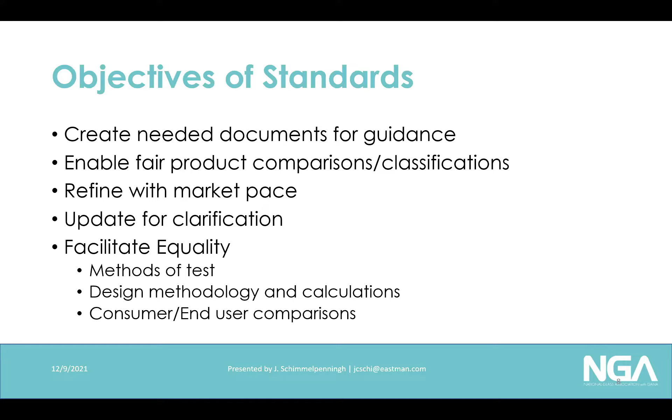That means that we have methods of tests, design methodologies and calculations so that everyone is looking at things the same way. We're also trying to provide information so consumers and end users can make fair and level comparisons. With those objectives in mind, we are going to dive into what we have for new standards for laminated glass.

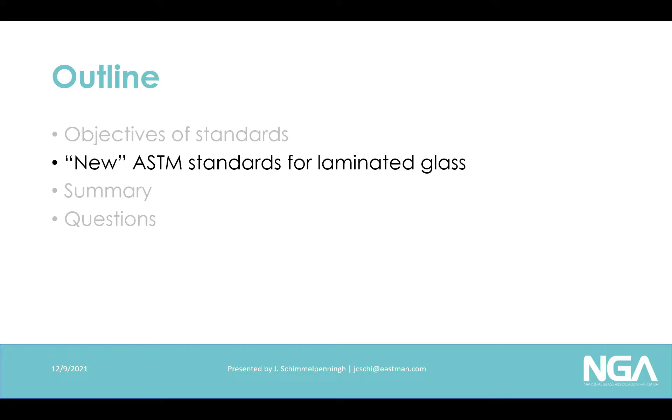As you all know, there are several standards for glass and glazing and laminated glass in general that have been published and serving the industry very well for many years. So one of the things we want to look at is why were these new standards needed? It's always a question. Some say, don't add the complexity, we're okay where we are. Others say the industry is evolving, we need some guidance and field posts as to how to talk about these products and compare performances.

So we will look at why these particular standards were needed, where did they come from? Obviously they don't grow out of the ground, it comes from some type of documentation at some point. And then we'll also look at how will they be used, which we'll get into at each stage. But where did they come from is one of the things I do want to answer.

The ones we'll be talking about, at least the first two, have come out of a need for harmonization that occurred with ANSI Z97.1, the safety glazing standard for tempered glass, laminated glass, chemically strengthened glass, etc., used and referenced in the US by itself or through the CPSC, the Consumer Product Safety Commission. There is a big section within that standard that covers a lot of documentation, and the committee did think it would be best if those items were pushed to a larger forum and approved by the industry as a whole versus the smaller committee, ANSI Z97.

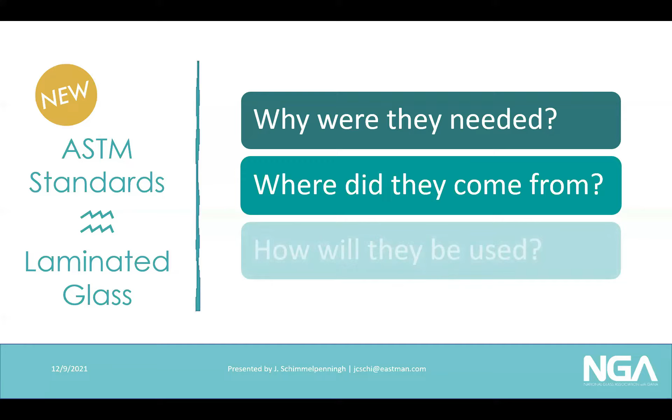The third one, which is more of a quality and specification standard that we'll get to, is needed because of all the new applications or extended applications that laminated glass is seeing, and it has to do with adhesion. So we will address these three questions throughout the remainder as we look through these standards.

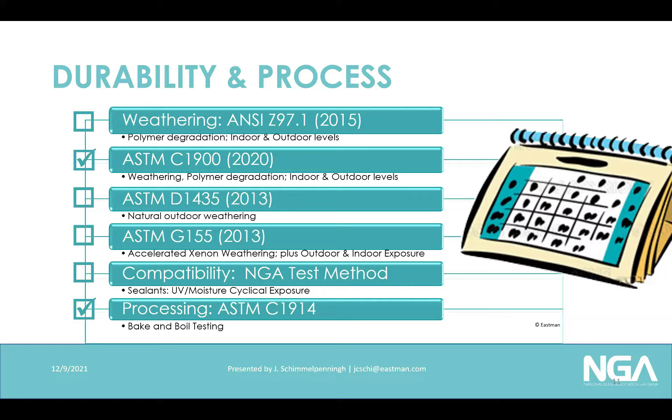So with that, the C1900, which is the weathering standard, is intended to cover the procedures for exposure of laminated glass, to look at the durability of the product and any polymer degradation. The standard itself gives you two main options to test in: an accelerated mode, which is a 3,000 hour mode, or a natural exposure mode, which is done outside in the sun.

We'll talk about all of those different modes. The time duration is specified by the authority having jurisdiction, so this standard does not specify a time or duration of exposure. However, a document like ANSI Z97 will give you the required exposure duration to meet its standard requirements, and in this instance, ANSI Z97 says it's 3,000 hours of exposure.

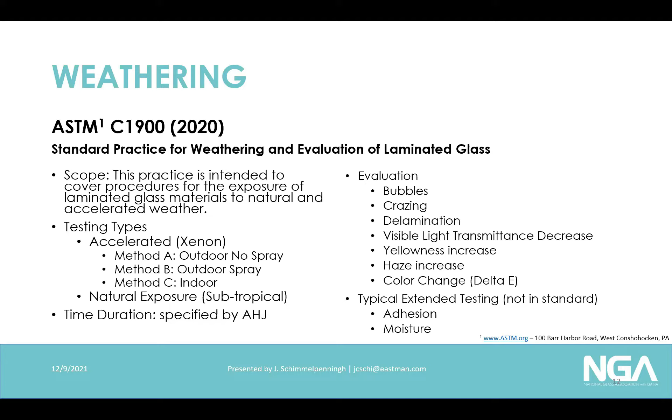Typically, the external use products here are things like facades, storefronts, windows, doors, and that type of stuff. You can use external exposure to clarify or qualify things for indoor use as well. Typically it's the same exact exposure, however done under a 3mm piece of clear glass. A little tougher—I think in the industry many people revert to the accelerated method for indoor exposure because of the complexity of mounting all of that on these frames. But products that would typically need indoor exposure only are things like partitions, shower doors, fins, balustrades, furniture, anything that might be located on the inside of the building.

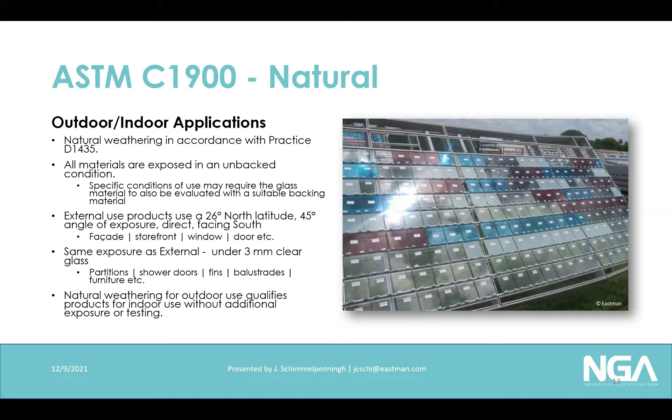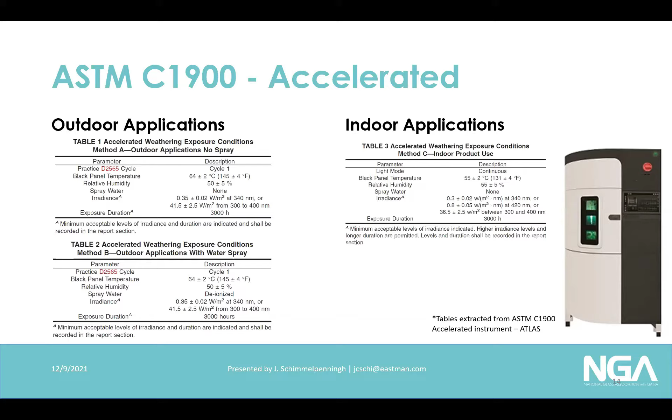When choosing a dry method over a spray method, I think the reason both are included is that currently ANSI Z97 requires the water spray. However, because of etching of the glass and the inability to get very accurate measurements, the dry method was put into ASTM as an alternative. We can talk about how you do that as well.

So what's the industry impact of C1900 coming onto the scene? The good part is there's no change in the irradiation for accelerated weathering for ANSI Z97, and no change for natural exposure either. The only difference is C1900 gives you a very concise dry method, whereas ANSI Z97 currently only requisitions the spray method, requiring you to weather another piece of glass as a control. So that's one change. The good news for the industry is you don't have to redo a whole bunch of accelerated weathering to comply with C1900. It standardizes weathering and reporting for materials, allowing comparison under the same conditions.

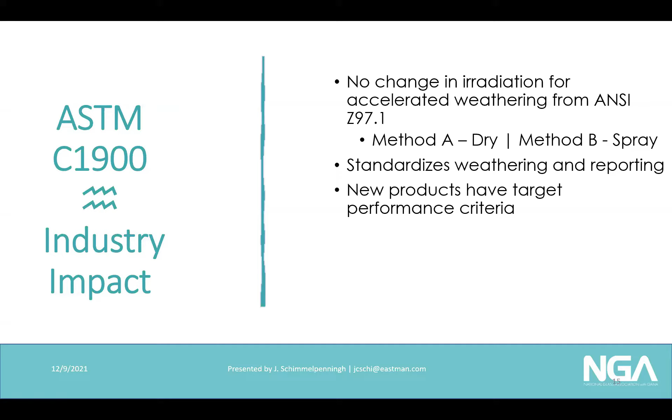New products have target performance criteria to meet, so it's good for the people creating new products, as well as good for the industry, to see how they compare with a very well-known set of criteria.

It's compliant with SGCC requirements, meaning we did not change the weathering portion of it. So as long as you follow the ANSI B method, everything will still meet SGCC. Again, you do not have to go and requalify anything.

There may be a renewal period and some other things like that from SGCC, but the method itself is compliant. What we may see is increased requests for exposure data and compliance from downstream. With these standards becoming international standards, people become aware and may start asking additional questions and for additional backup data.

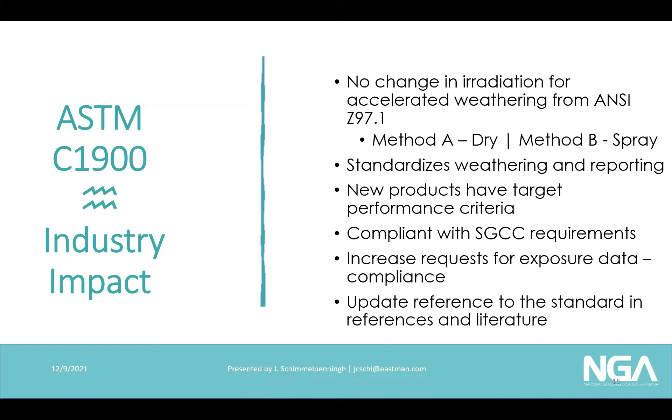The other part of having an international standard through ASTM is the update of references in our standards and literature, our laminating reference guide, and all those things. That will need to take place, and will be something we'll be talking about and working through in further NGA conferences.

The next standard is ASTM C1914, just published this year. It is the standard method for bake and boil testing of laminated glass. The great news is it is not a change from anything we are used to—it's just put into a consensus standard and gives us a little more detail on how to run it and how to rate it.

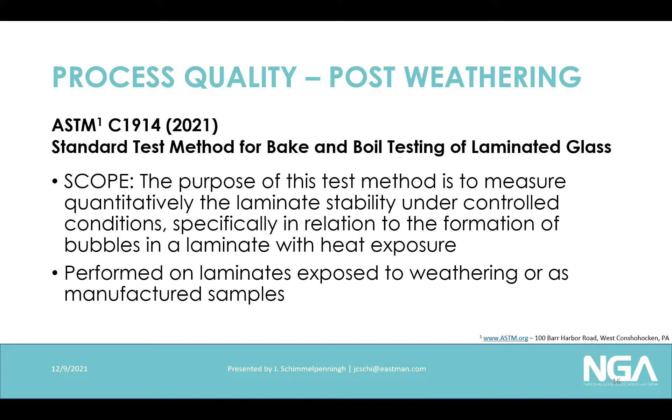The purpose of this test is to measure laminate stability under heat exposure, and give us an assessment that can be used for quality control. You can perform this test on laminates exposed to weathering—if you put something in an accelerated chamber or products come back from natural exposure, you can run these tests to see how they do. So it can be run on weathered samples as well as samples coming off the manufacturing line.

It is a visual rating after you subject the samples to heat. The heat can come in two ways: at 100 degrees C, 212 F. The boil is for 2 hours—you literally submerge the laminated glass into boiling water for a 2-hour time frame, then take it out and rate it. Or you can put it in a 212 degree oven for 16 hours, then take it out and rate it. What it does is determine the stability of laminated glass in these high heat environments.

It has always been referenced as the standard temperature and time in ANSI, and also for both the automotive industry and the architectural industry. A couple things it does: it determines if there's a large amount of excess air or moisture trapped in the interlayer that can cause issues.

It's a good indicator of high moisture content, and it can also indicate if volatiles are formed with exposure—say there may be some polymer degradation. You may see boil or bake failures when samples come back after exposure.

One thing the boil and bake test doesn't do is provide an indication of laminated glass being capable of impact resistance, glass shard retention, or anything on breakage or edge stability. It truly is a durability test.

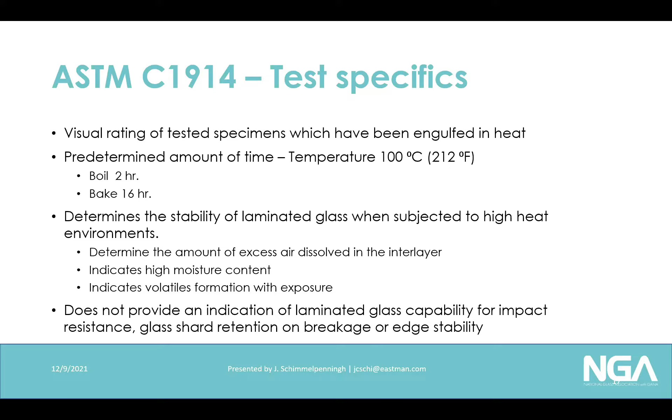What it looks like: it's typically run on either a 12x12 or a minimum size of 6x6. You do 3 specimens per test—meaning you put 3 specimens from the same run or same laminate into the boiling water, take it out 2 hours later, or put it in the oven and take it out 16 hours later.

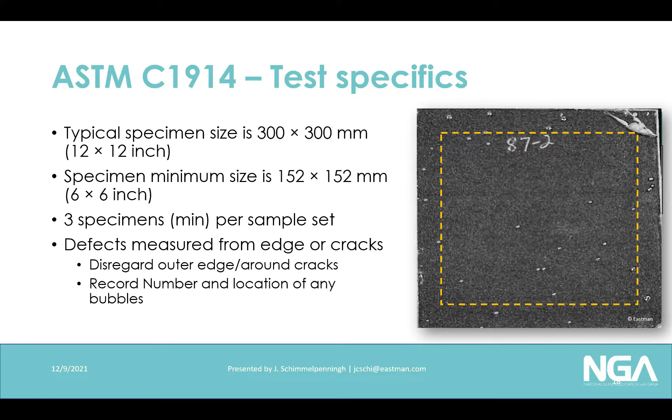One thing the test does allow is that you don't rate from the edge and you don't rate from cracks. Part of that reason is as you section or cut apart to do the testing, you can falsely destroy the edge. So it gives you a leniency of about 13 millimeters to look at that.

What's the impact of this standard on the industry? Again, no change to the requirements. The standard can act as a processing check for quality control and also for weathering. Same thing—new products have a criteria.

A watch out is that the newly approved ISO standard for laminated glass in Part 4 is not the same as this. It allows the user to decide whether they want to boil for 2 hours or bake for 16 hours, or vice versa.

So it does have the boil for 2, the bake for 16, but the user can choose whichever combination of those methods they want. So a caution to any of you that are specifying or looking at that is to make sure if it says it's compliant that you get what you're asking for.

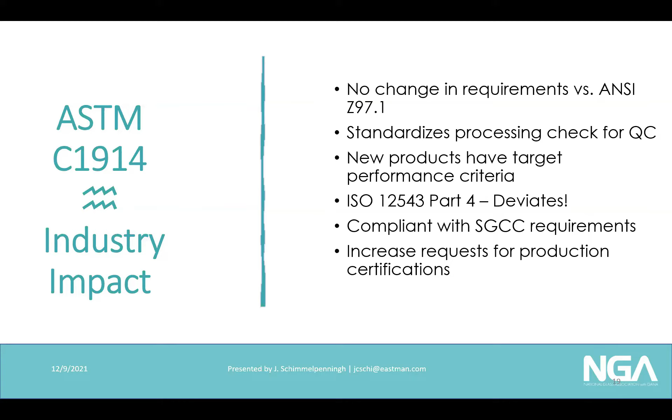This also is compliant with the test method for the SGCC requirements because it follows ANSI. And we may again see increased requests for production and certifications on this.

Okay, so the big change in the last few minutes is the adhesion test. This is the Pummel adhesion test. Now the Pummel test has been around in the industry for decades. And this is a method to look at the relative strength of the adhesive bond between the interlayer and the glass, or inks in the glass or whatever.

It is a method that is destructive. It can't be run in place. It has to be done in a laboratory. And again, it is a destructive method. So don't think you're going to do this and then go forward. So you have to have specific samples for it.

You can use it to look at all different types of laminated glass. Typically 2 layers of glass is where you want to stop because then it gets a little erroneous. One of the surfaces can have anything on it, inks, coatings, frits, patterns, whatever. You will note that because there can be some differences based on those materials and the level of adhesion.

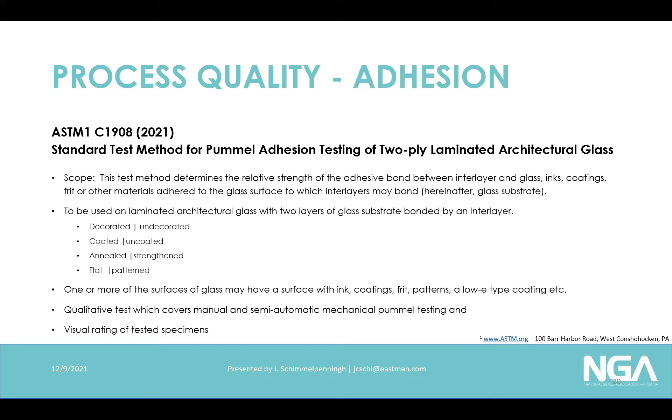It's a qualitative test and it covers both manual and semi-automatic pummeling, and we'll show you that, but it is a visual rating. The test method is a visual rating right now. So how do you do this test?

It's very rapid, and I can go through all the words of it, but we do have a video that will show it to you. So I think that will be a little bit more illustrative, but it's a rapid, systematic, really hammering of the glass. It's progressive striking. And what you're trying to do is expose the interlayer. You're trying to get the glass that easily comes off of these products to come off so you can understand the level of adhesion you have.

There's a certain amount of energy necessary to pound this glass off of it and separate the 2 surfaces, the glass and the interlayer. And the strike face of the hammer needs to be as flat as possible. Otherwise, you can skew the results.

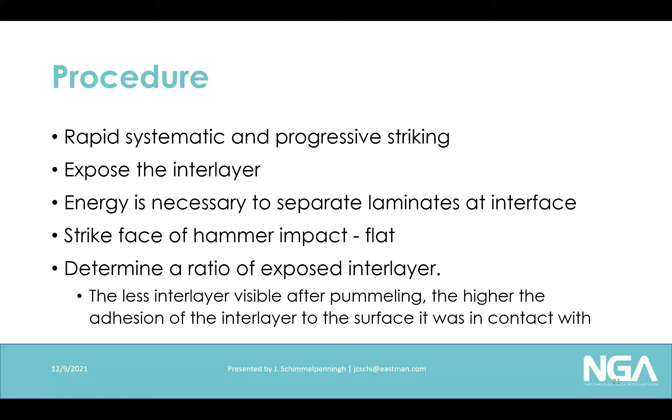And so what it's doing is determining the ratio of exposed interlayer. The higher the amount of exposed interlayer, the lower the adhesion. So what you're really trying to look for, depending on your application, is that balance of exposed interlayer and glass to give you the performance attributes you're looking for.

Again, it's a relative adhesive bond. It is not an absolute.

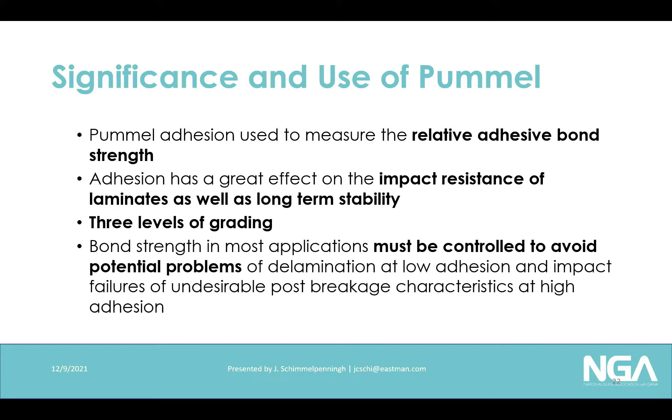Adhesion does have a huge effect on impact resistance as well as long-term stability. There are 3 levels of grading that are in this standard, and bond strength in most applications needs to be controlled, and that is to avoid potential problems of delamination if the adhesion is too low, or sometimes post-breakage characteristics that are undesirable at high adhesion levels. And so you do really want to target it for the type of application you're looking for.

Because you are smashing glass, there are some general safety guidelines: cut resistance gloves, safety goggles or glasses, and a face shield, and it does get loud. And so hearing protection is also very highly recommended.

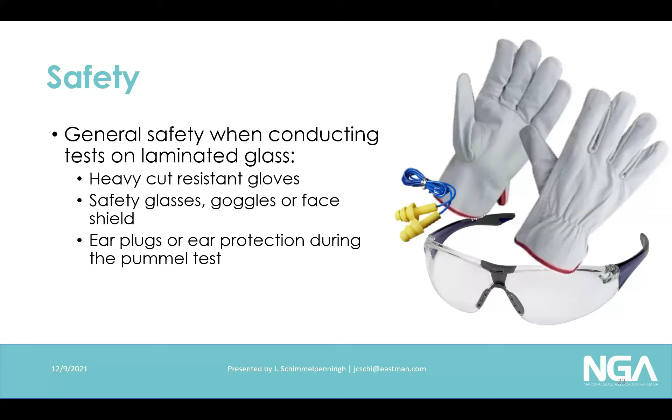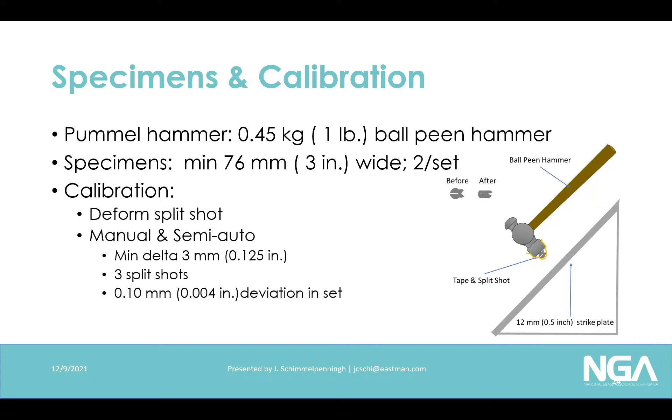You can calibrate the material. It's a simple method. You take literally split shot, tape it to the hammer, as you can see, and you pound it, and you know that you have enough force if it flattens, and you meet the requirements for how hard it flattens. This is a great method for somebody learning how to pummel, to make sure that they have an idea on a manual pummel of how hard they have to strike the hammer. It's an excellent method for the semi-automatic because it tells you whether or not the piston is firing at the right response rate at each time.

The conditioning of the pummel samples is another section that is addressed in this. The duration of how long you condition it is not specified because the thickness of the laminates and the amount of laminates you may have in your conditioning cabinet can change. So there is guidance on reaching the target temperature. You can do that with thermocouples or through experience or through calculation.

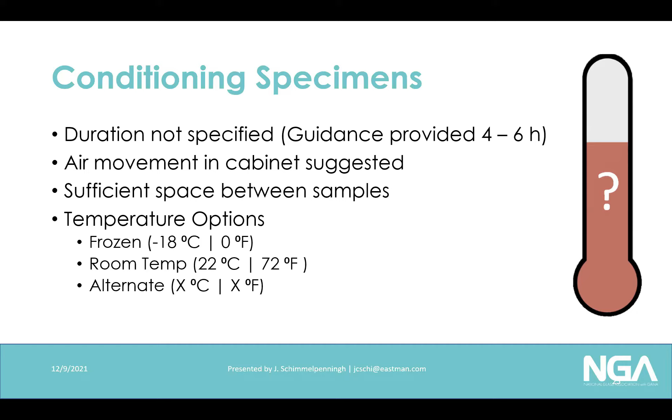The temperature options in the standard are frozen at -18°C or 0 degrees F, room temperature, or an alternate as specified by the interlayer manufacturer. The reason there's 3 different ones is because they do respond differently based on the temperatures. Okay.

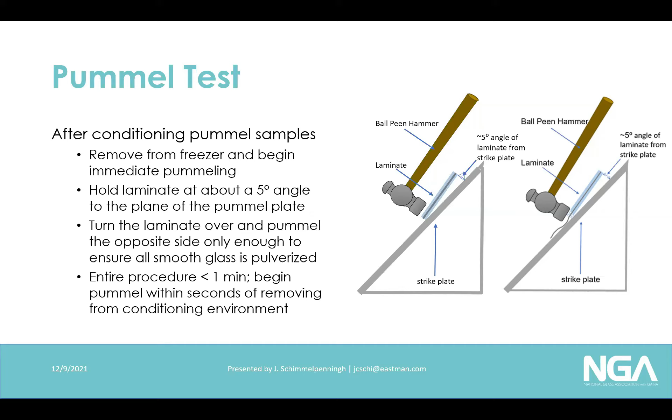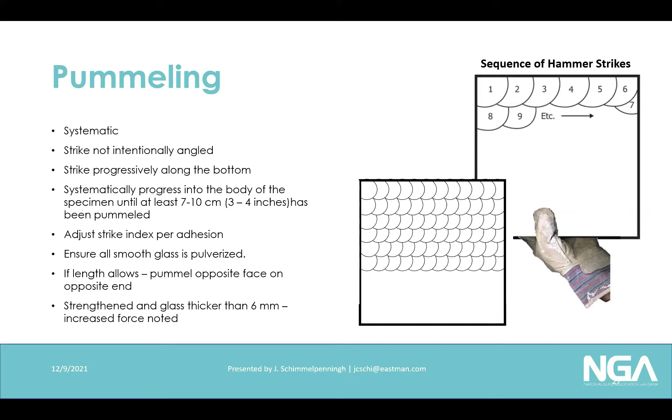You recondition the samples if they have been at other than room temperature, so that all the condensation is off, and you compare the rating to pictures and rate both sides. There's a whole bunch of information you'll get about how to group them and how to do different things as far as the rating.

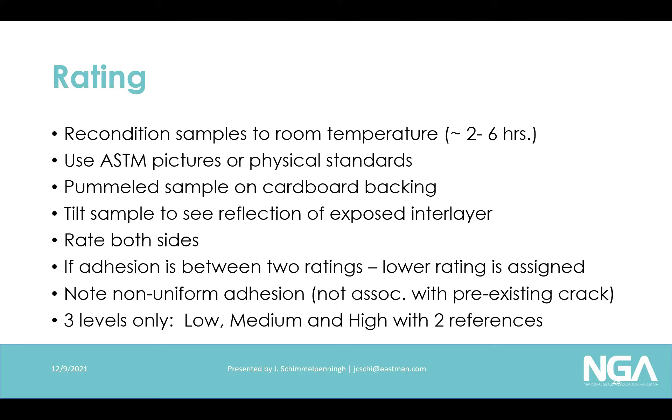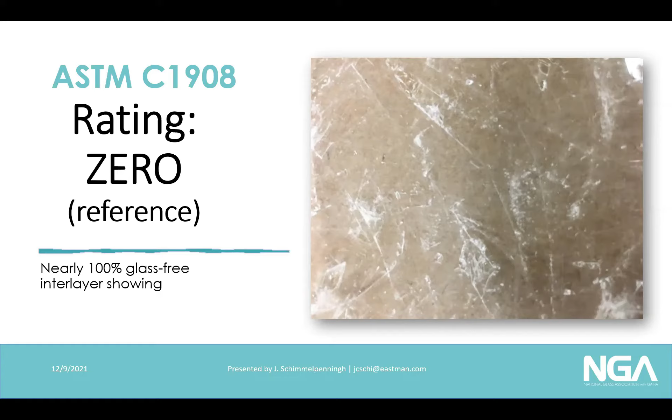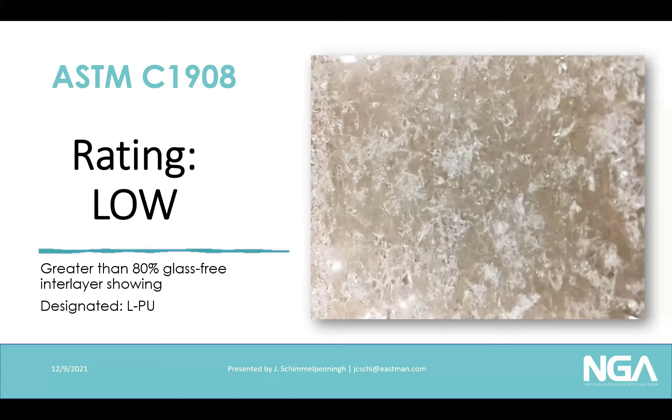But the ratings look like this. This is a rating of 0 - this is not actually a rating, it is a reference, and you can see the large areas with nothing but some glass dust on the surface of the interlayer. This is a low rating, and you can see there's about 80% free interlayer to the glass. The white parts are the glass parts that are still on. It's on a piece of cardboard, and you're actually seeing the brown cardboard below the sample.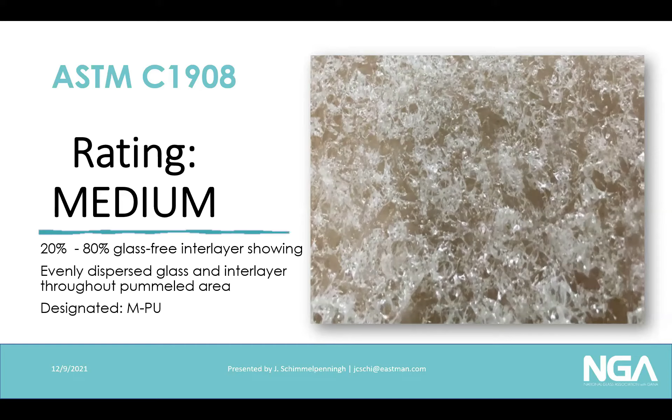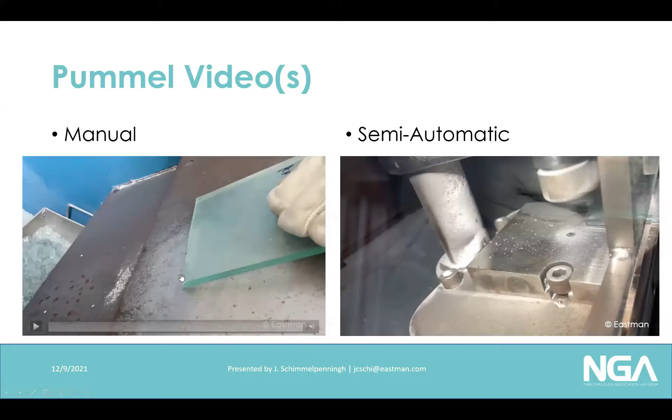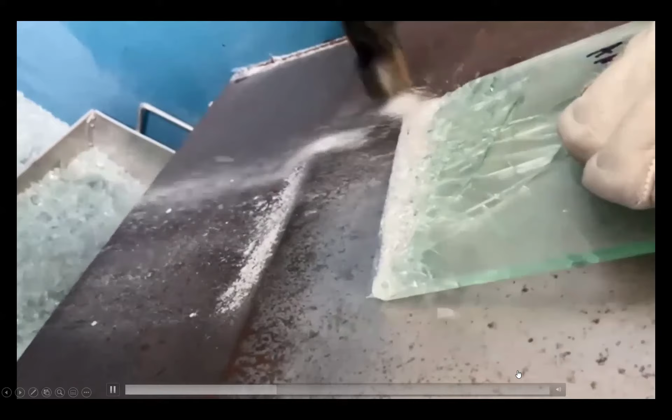Just quickly, this is the pummel method. This is a manual method, and you continue to do that until you reach what you have. And this is a semi-automatic method.

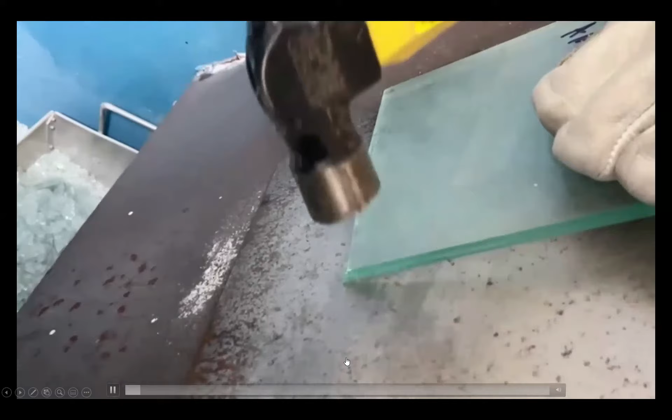So it's pretty quick, it's pretty easy to get through. And the interpretation of results - you can see how you rate it. There's a big section on how you actually do that.

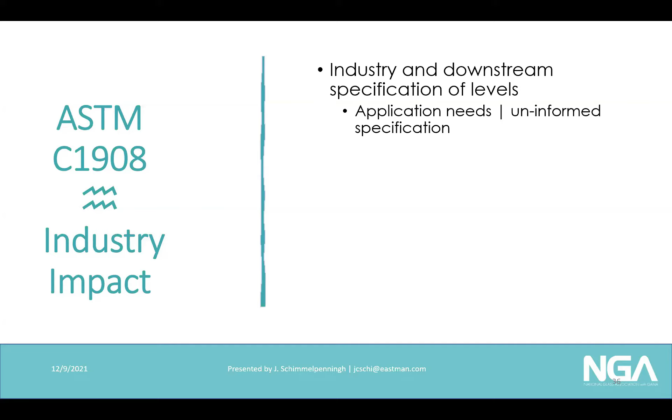But the impact of this to the industry is the specification levels you may see based on the application needs. We may have uninformed specification where people will say, oh, I automatically always need high adhesion because that's better. Well, it's not better for all applications. Sometimes a very balanced adhesion level is best.

And so understanding those differences before it gets specified is critical. The other part is you may see some requests for compliance documentation and testing, having to test coupons or batches and what the frequency is. Those questions may be coming to our laminators from the industry - requests for pummel standards, be it physical or pictures. Those pictures are within the ASTM standard, but some people do like physical samples.

And there will be an evolution of systems and digital ratings that aren't currently available, so look for this to really start evolving. The other thing is reference to the ASTM levels, and training in laboratories is going to be very critical to make sure that everyone is up to speed and doing it the same way.

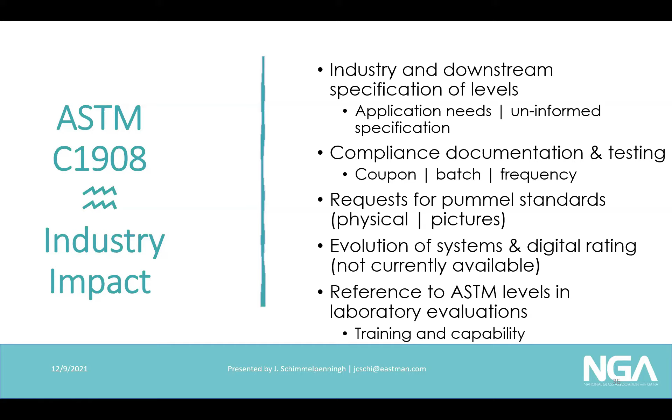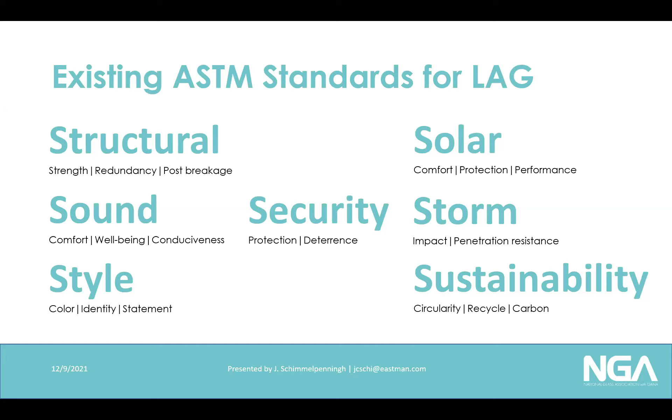So in summary, those are the new standards. You can see that there are ASTM standards for laminated architectural glass in all of these areas. They continue to evolve, but those were the newest ones published in the last 14 to 16 months. And the big thing is as laminated specifications increase, the standards need to keep pace. The requirements for quality information on laminated glass is increasing, and the processes are developing to provide those compliance documentations from all parts of the

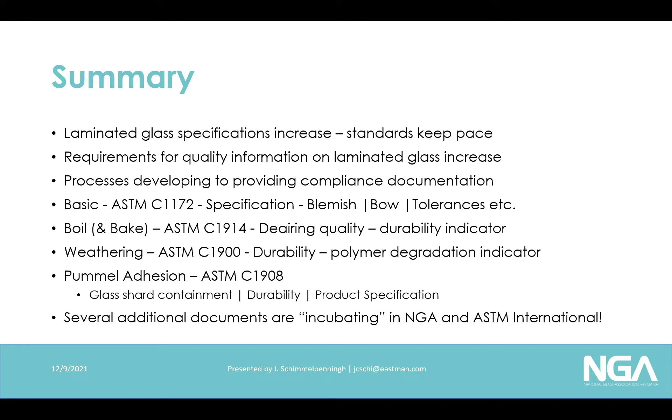value chain. We do have the basic standards - we have the boil and bake, we have weathering, and now we have adhesion. And there are also several additional documents that I'll call incubating within the NGA technical side and ASTM International, so we do need to watch for those.

Our question, and not for today, but for at any point when we can talk to NGA, is what else is needed in the laminated market or in the glass market in general. NGA is a huge proponent of pushing these things so that we have the right standards and the right documents in place. So please do talk to any of the NGA staff or your liaisons or your chairs about what else is needed.